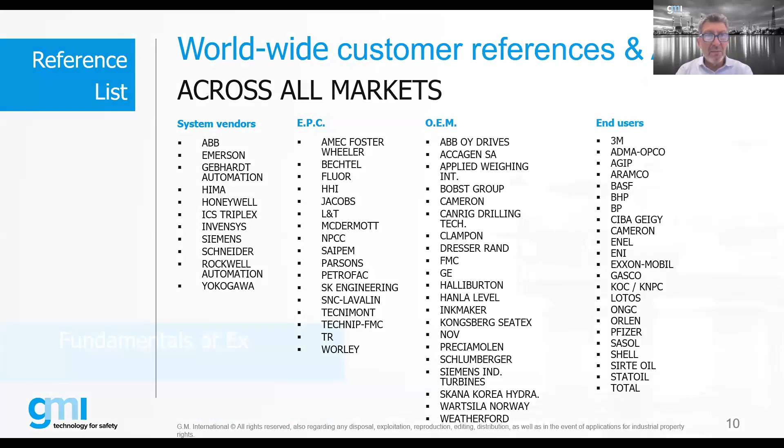So a little bit about fundamentals of EX. We're actually, I realized this morning I'm wearing an Intertek shirt, so I'm actually today teaching a course. My colleague's taking over right now, but we're teaching a Compex course for a bunch of engineers and designers over the next 5 days. So we're going to consolidate the 5 days of what we're doing in the full Compex design course into 45 minutes. We'll hit the high points and give you a little bit of an overview on the fundamentals of EX in particular.

So really getting down to the fundamentals. In order to have an explosive atmosphere, we need to address either gases and vapors and mists, combustible dust, or ignitable solid particles. One thing that usually comes up when we're teaching these courses, people always think it's the oil and gas industry, refineries and offshore oil platforms and everything else. But a lot of people don't realize that we're actually pretty much surrounded by hazardous locations in which a flammable gas air mixture or dust or particles are present, and they operate in many different industries.

I was talking with a gentleman about bakeries, because bakeries use dust, they have dust hazards, so they have to address it in a certain way. So you wouldn't necessarily think a bakery would be a hazardous location, but there are parts of a bakery that actually are. I was talking to a gentleman last week about the automotive industry. They use a lot of solvents for paints and various materials, and so they're actually dealing with robots being suitable for hazardous locations. So there's hazardous locations all over the place that we don't necessarily always think about.

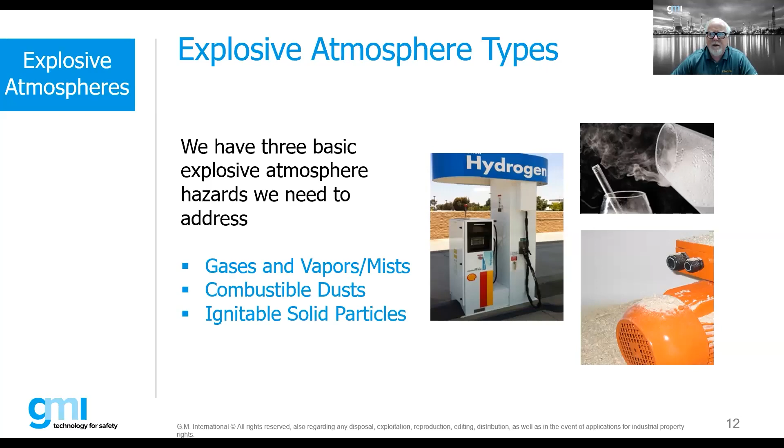So here's the important thing to remember about these explosive atmospheres. Generally, liquids will not ignite, it's always the vapors that are usually the issue. So when we keep it in a liquid format, then we don't usually have problems. But unfortunately, to keep them from becoming vapors, we have to keep them at usually extremely cold temperatures, and that's not practical in many cases. So anytime we're processing, moving, or doing anything with flammable liquids, they will emit vapors, and the vapors are the issue we have to deal with. Of course, these gases can be easily ignitable and very dangerous, given that they can spread quickly and widely.

So there's a term called flashpoint, which we use a lot. Basically, flashpoint is that temperature at which a liquid becomes a vapor, where it'll emit enough vapor to actually cause an explosion if it comes into contact with heat, an electrical spark, or something of that nature. So typically your flash points are different than the ignition temperatures. There's also what's called ignition temperatures or auto ignition temperatures of all these gases and vapors present in hazardous locations. So again, that's the temperature at which an ignitable amount of gas is emitted from a liquid. Ignition temperature is the temperature at which a gas will spontaneously ignite.

So dust can be any of the following types of materials. Not all dust are flammable or explosive, but these are the typical ones: metal dust, aluminum, magnesium, carbonaceous dust, coal, carbon black, charcoal, coke dust, and then certainly some of the other types like flour, grain, wood, plastics, and chemicals.

Some of the earliest hazardous locations that we actually figured out and had to deal with came from the coal mine. Some of the first protection concepts like intrinsically safe and flame-proof were actually developed for the coal mines, because coal mines have a combination of both methane as well as coal dust, and both of them are extremely volatile, very dangerous.

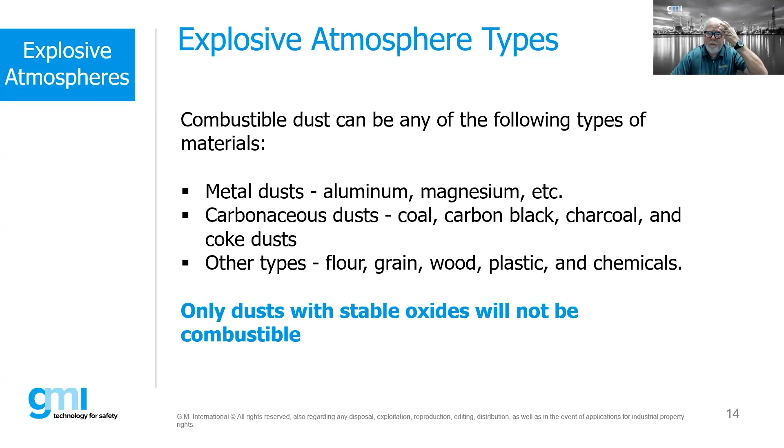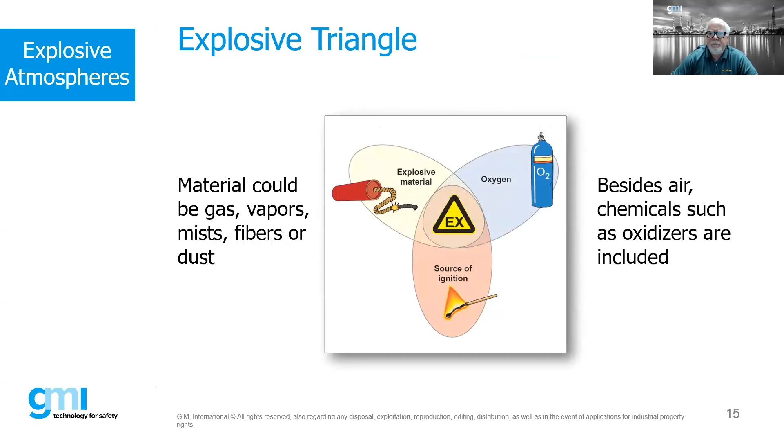So we need to make sure that we understand all those types of energy that can be sources of ignition. Some of them are pretty obvious, right? Hot surfaces could be bearings, engine exhaust, damaged parts, friction, and certainly lightning can be a source of ignition. We had a train derailment here in the United States a couple months ago up in Ohio. The train was carrying some volatile liquids, and it created a huge explosion. They found that it was basically an overheated bearing that was the source of ignition in that instance. Obviously, things like open flames, fires, cutting torches, cigarette lighters, pilot lights.

There's also things like mechanical sparks. There are limiting factors within the standards as far as the types of metals you can actually use, because you can get a reaction from banging two pieces of metal together.

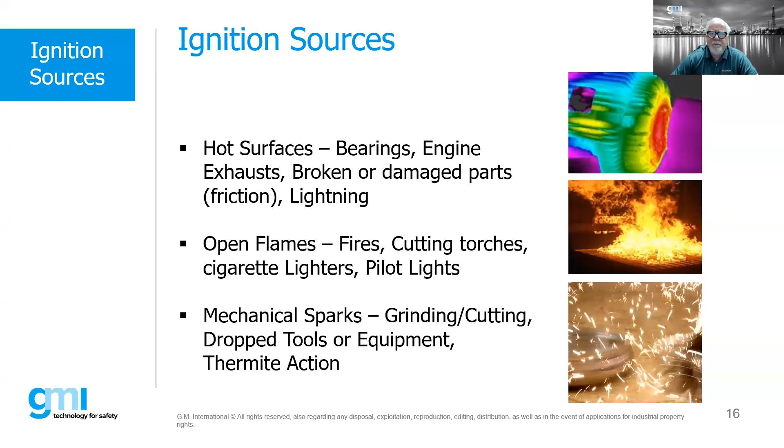So we have to be very careful with the types of metals we're using. Then, of course, there could be stray electrical currents, welding, electrical faults, static electricity, pouring, dust, flowing liquids, conveyor systems, agitators, stirring liquids. All of those have to be addressed for what potential they could have for igniting a flammable atmosphere. And then certainly radio frequency, as we're becoming more and more tied into using Wi-Fi and local area networks in hazardous locations, we have to deal with this as well. We have to be concerned about radiated noise - is there enough energy in which that can actually ignite gases, vapors, or dust?

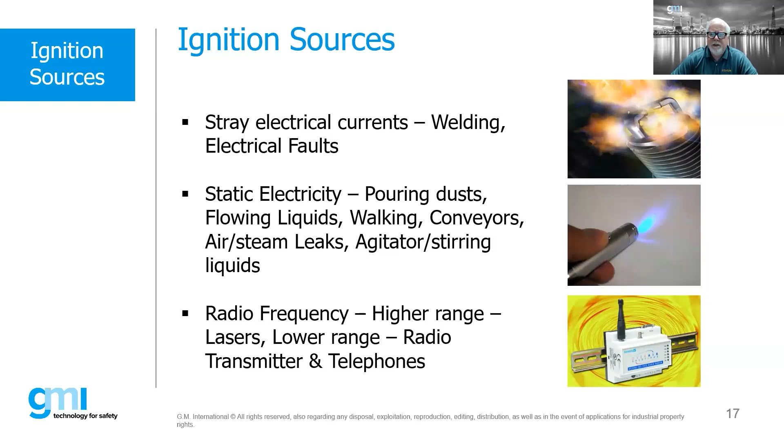And certainly things like batteries, ionizing radiation, X-rays, ultrasonics, exothermic reactions. When we think about exothermic reactions, for example, the ammonium nitrate explosion that took place in Beirut a couple years ago - that was storing ammonium nitrate. When that becomes unstable when subjected to heat, it feeds upon itself, and the next thing you know you have a chain reaction, and in that case, a massive explosion.

So again, we think about the obvious sources of ignition generally, but we don't necessarily take into account some of these other sources of ignition that can be just as dangerous. In some cases these are things we don't necessarily think about, but we need to take them into account in our projects and requirements.

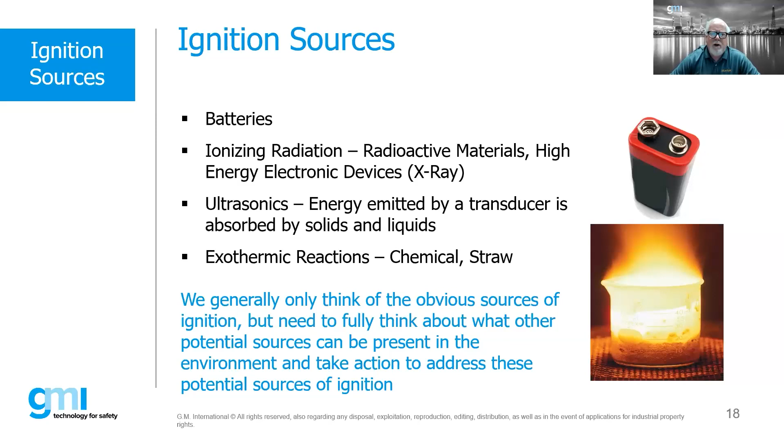So of the gases and vapors out there - and there's a whole slew of different flammable gases and vapors - we categorize these into various gas groups to make it easier for the selection of EX equipment. We group these based upon a couple different factors, one of them being the ignition temperature, but there are some other factors that are actually much more important.

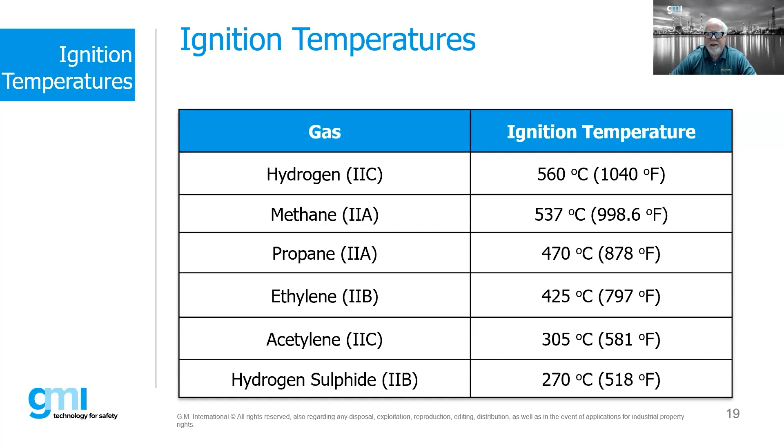Here's some of the common gases and vapors we'll see in industry, such as hydrogen. We consider that a 2C gas. It has an ignition temperature of pretty high, 560 degrees. Something would have to get extremely hot for it to ignite hydrogen from strictly a heat standpoint. All these numbers will be located in the various relevant international documents and IEC documents. You'll find them in NFPA documents, and various other documents that give the relevant information on all the gases and vapors we'll typically find in industry that we have to deal with.

When we talk about intrinsic safety, ignition energy is a key consideration, because the whole idea of intrinsic safety is making sure that there's not a release of energy above that minimum ignition current or minimum ignition energy.

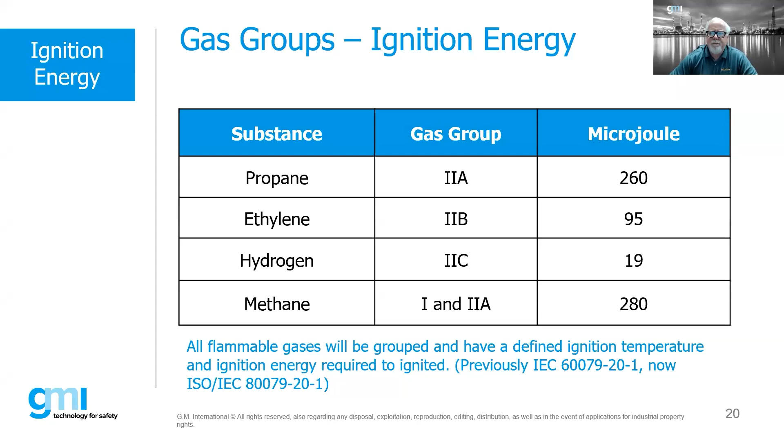So, minimum ignition, LEL and UEL. LEL is the lower explosive limit, UEL is the upper explosive limit. All gases and vapors will have an LEL and a UEL. Generally speaking, most gases and vapors you'll find will have somewhere between a 2% LEL and a 10 to 15% upper explosive limit. Within that area is the sweet spot, if you will, where if we have that mixture of fuel to oxygen, we have a source of ignition - at that point, we're almost guaranteed to have an explosion if it's got enough energy.

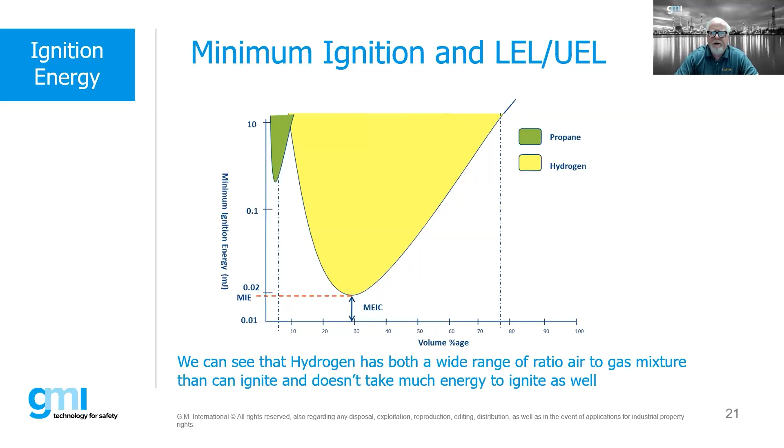I know a lot of people are all talking about using hydrogen as a fuel now. There are some real critical things that we have to be very concerned with using hydrogen. It's a very efficient fuel, but it is also a very dangerous fuel that we need to take special precautions with.

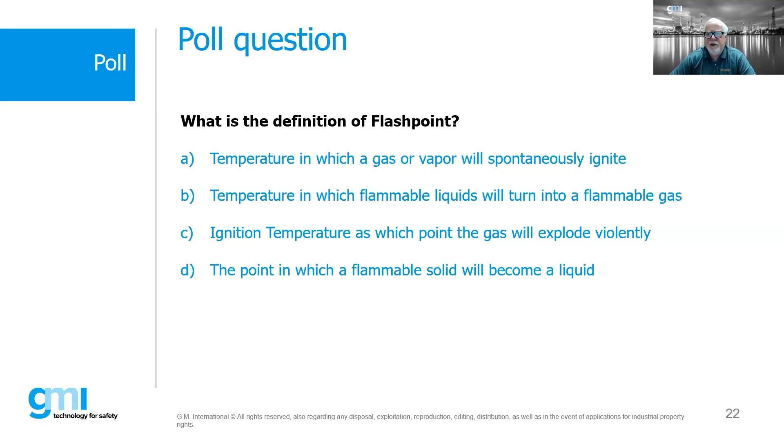Moving on a little bit, we also have to take into account the ignition temperature of the gas, and we actually assign these gases a temperature class number. This becomes important when we start selecting equipment for use in hazardous locations, because we also assign temperature codes for equipment. If we see something that is a T3 piece of equipment, what that's telling us is that the equipment will have an ignition temperature below 200 degrees C. If we see a T3 gas, that means that gas will have an ignition temperature above 200 degrees C.

So in effect, we can use a product that's rated T3 in a T3 environment. We can also use a product rated T4, T5, or T6, because the relevant surfaces of those products, under normal ambient or specified fault conditions, cannot get above 200 degrees C. We cannot use a product rated T1, which tells us it has a relevant surface temperature below 450 degrees, in an environment where the ignition temperature is, say, T3, which is something above 200 degrees. So we have to take this into account.

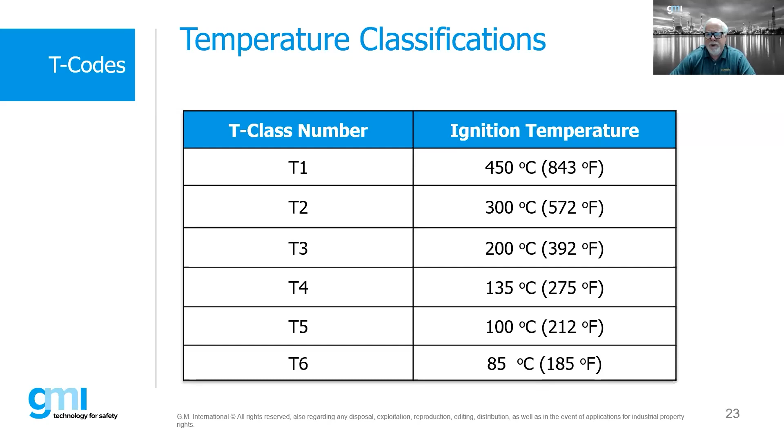This becomes extremely important when we have heat-producing devices like transformers, light fittings, rectifiers, those types of products, or we have gases and vapors that will have very low ignition temperatures. We always have to take this into account - temperature classification. Keep this in mind.

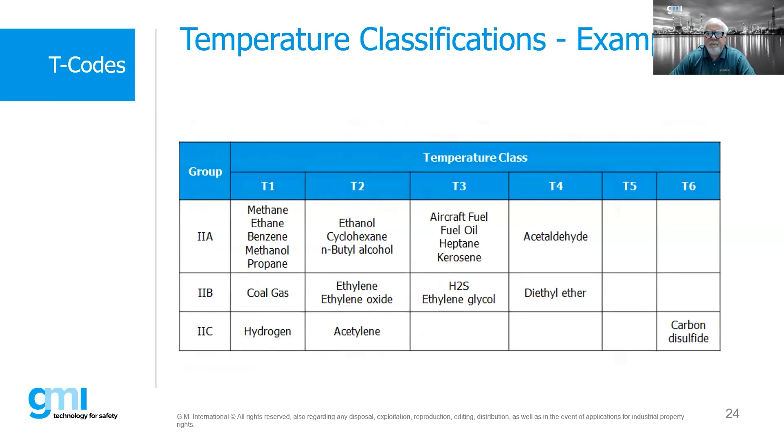We'll assign a T code to all these particular industrial gases and vapors, and that's where this chart comes from - it's more or less showing what I've already explained. One thing you'll notice on this chart, by the way, is right off the GMI wall chart that they give out for free. If you want a copy of it, just drop us a note afterwards and we'll be happy to get this to you.

Using T4 as an example, a product will never exceed 135 degrees C. A T4 gas will have an ignition temperature above 135, but below T3, which is 200 degrees C. Therefore, a T4 product can be used in a T4 or hotter ignition temperature gas environment.

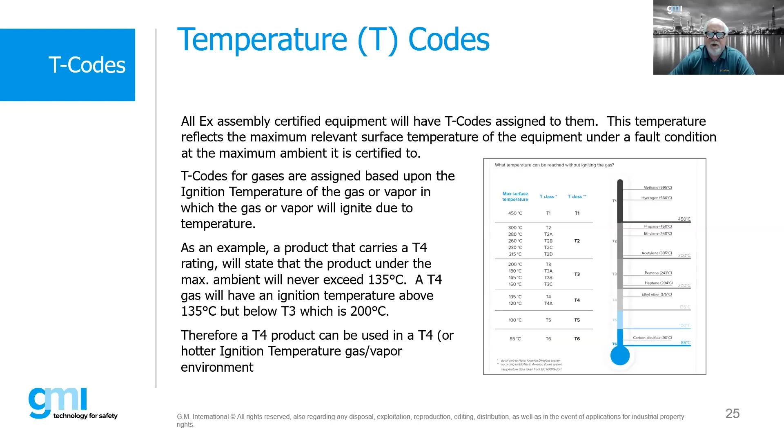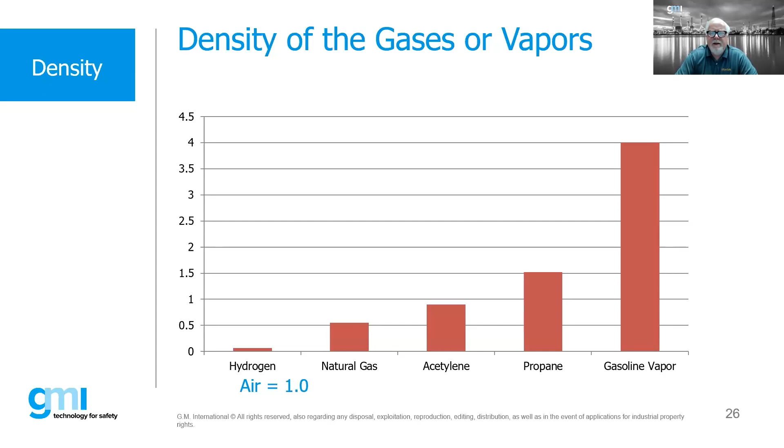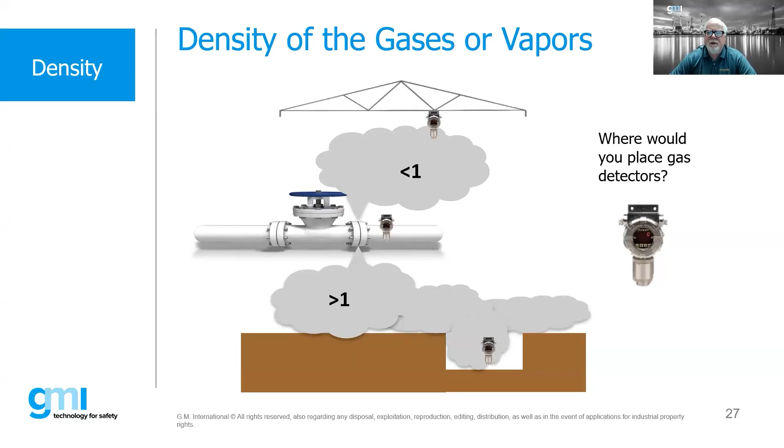This is very important when we're trying to determine where we're supposed to place things like gas detectors. Depending on the density of the gas, we place them in different locations. If the gas is heavier than air, we put a gas detector at a low point. If the gas is lighter than air and it's an enclosed space, we might put them up in the ceiling. And if the gas has the same density as air, we place these gas detectors pretty much everywhere. So when we get into the design of our systems, this starts to make better sense based upon the density of the gas.

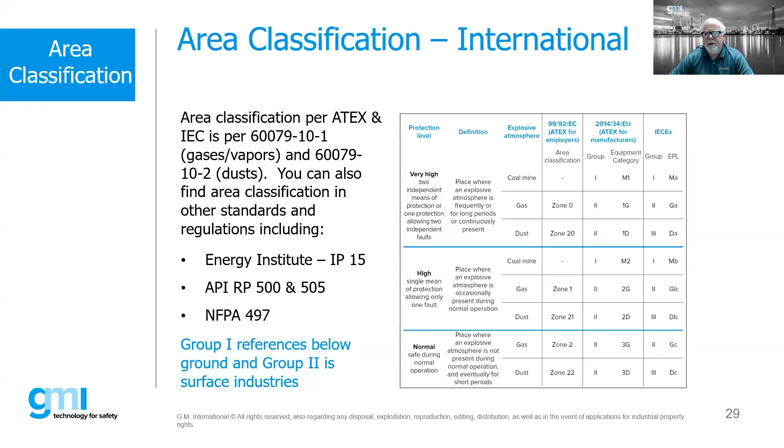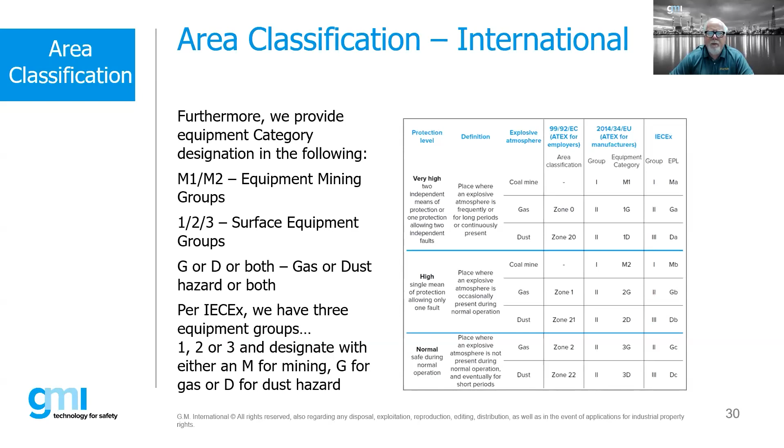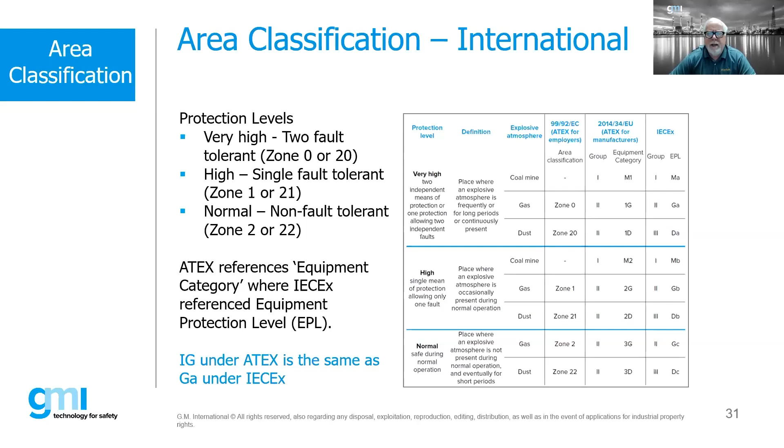We're talking about zone 1, right? Yep. Zone 1, okay. Zone 1. So I think you guys are getting this for the most part here. That's good. Zone 1, we have zone 0 also, right? So yeah, well, zone 0 defined is in here.

Yeah. So okay, because I haven't read this previously, so I'm trying to guess myself which is the correct answer. Come on, Paulo, you know the answer. Normal operation. Yeah, I imagine. It's somewhat of a difficult question. B is the right answer, Bob. Am I right or wrong? What did you say? B? B. Yes. Yes, okay, I got it right. Thank you.

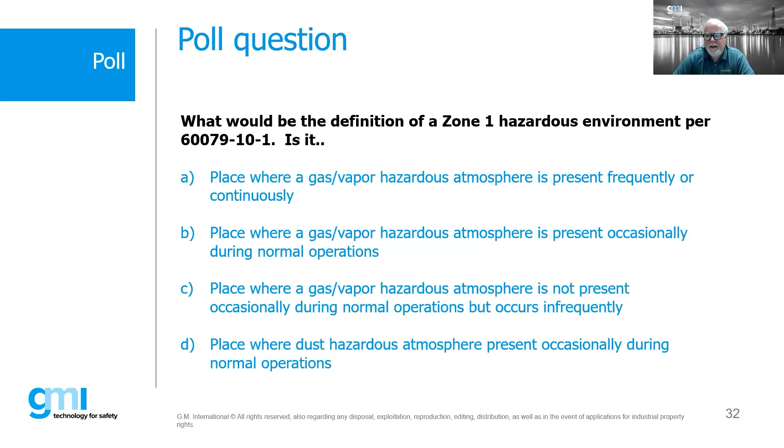Yeah. So okay. B is the correct answer, right? Because A would be zone zero. That's correct. The key word is continuous. C is not present during normal operation but occurs infrequently. That's a zone 2. The issue is on D, when we talk about dust hazards, that is a definition for zone 21, not zone 1. So it's a little bit tricky, right? So dust zones, we actually use 20, 21, and 22, where for gas hazards, we just use 0, 1, and 2. So a little bit of a tricky question there, but you got through it.

So now that we've kind of figured out our gases, vapors, area classification, then we want to get into our protection concepts. And again, this is where we could spend a ton of time, but we only have a handful of minutes to be able to do this. But if you kind of break it down, the Ex protection concepts are, with all these different concepts that are out there, more or less 4 main categories. Energy limitation, which is intrinsic safety. This is where we limit the amount of energy. A non-sparking type device, or a device that basically will not spark whatsoever under normal or fault conditions, that's typically reflected by the concept increased safety.

Things like containment. We contain an explosion, we allow an explosion to take place, but we contain it within an enclosure. That's typically done by flameproof. And then things like separation. We're removing a flammable gas from the source of ignition. Typically, that would be something like pressurization or maybe even oil immersion. So if we think about the legs of that triangle, what we're trying to do is, again, remove one or more of the legs of that triangle or deal with it in some way, shape, or form. For dust hazards, we have energy limitation, just like we do under gas. And again, intrinsic safety, or we have separation, which we call dust ignition proof or pressurization or dust tight. Those are where we're trying to keep dust away from any source of ignition.

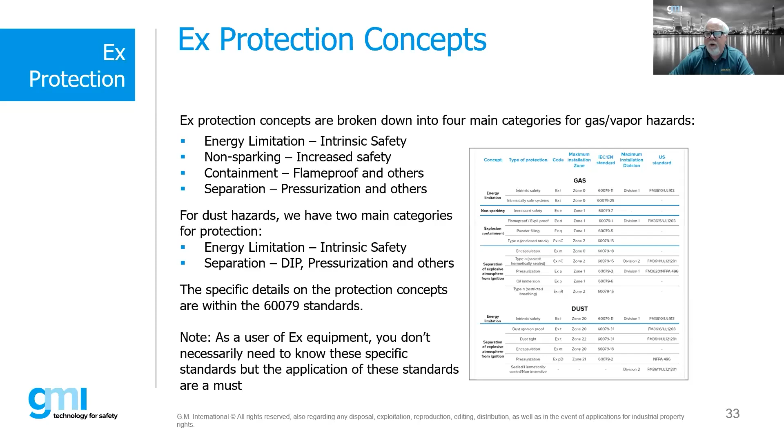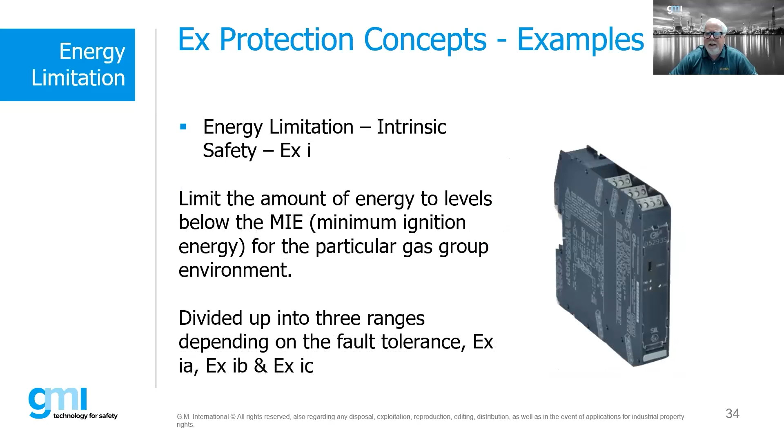So just to go through these in a little bit more detail, energy limitation, intrinsic safety: limit the amount of energy below the minimum ignition energy, and again, divided up into 3 ranges depending on the fault tolerance, Ex ia, ib, and ic. Non-sparking, the most common example is increased safety. So we have eliminated the potential for a spark or arc due to the design of the equipment. There's also what is called non-sparking, which used to be known as Ex nA, is now known as Ex ec, which was a lesser form of increased safety. The tolerances weren't quite as tight. The creepage and clearance distances, the impact resistance requirements, not quite as onerous, but it was only suitable for zone 2 applications, where increased safety was suitable for zone 1 and 2.

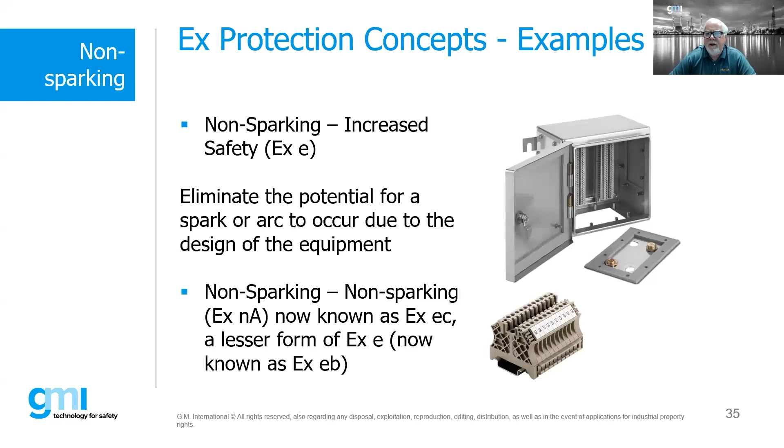So again, we're assuming we're going to have an explosion. This equipment will operate in a fashion to cool down that explosion to where it just doesn't go off and ignite the gas surrounding the piece of equipment.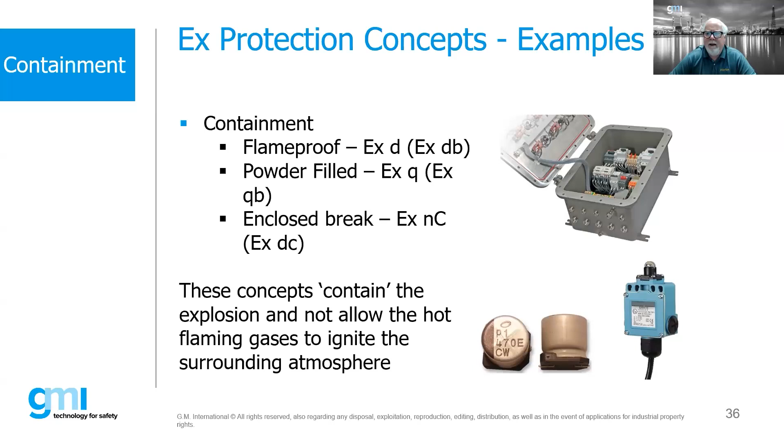There's some other concepts, hermetically sealed, where we're making the arcing or sparking separate from any gas coming into contact. Same thing with pressurization, where we're keeping gas vapors on the outside of our enclosure through the use of artificial pressurization. There's what is called oil immersion, and then finally restricted breathing. So all these concepts are basically separating the gas from the source of ignition.

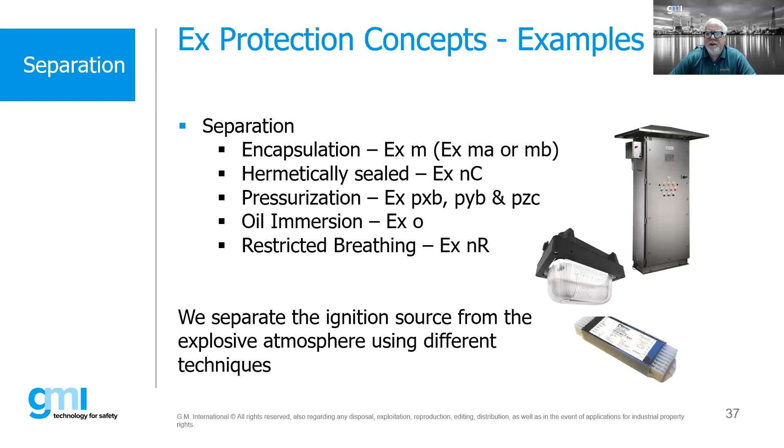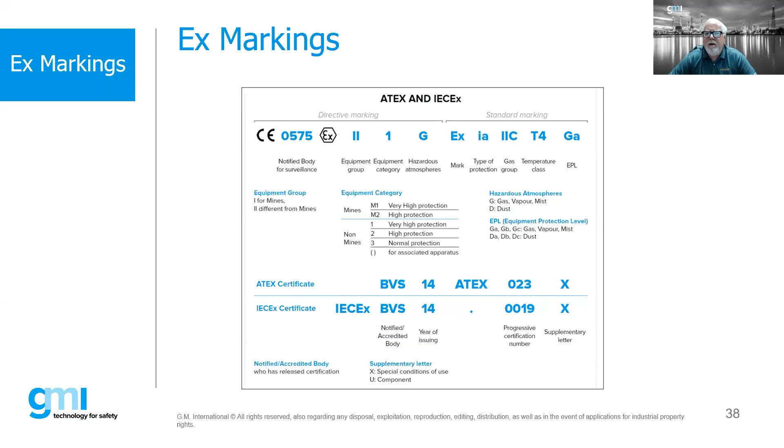So putting all this together is telling us that our product is intrinsically safe, can be used in a zone 0 application as long as we meet the gas groups, which we will, because IIC basically includes all gases. And assuming that the ignition temperature of our gas is T4 or hotter, then we can use this product in any of those environments, and it has its ATEX certification. And down here, it shows its ATEX certificate, and then its IEC EX certificate. So that's how we read our markings and labels.

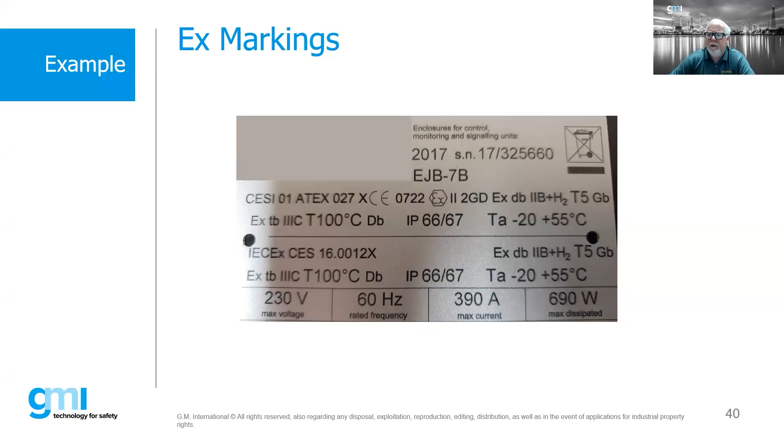So I think this is our last poll question. Yeah, that was going to be a tough one. What is the best answer to describe the following EX marking string? I mean, you show it to us, but it's not easy to memorize all of this, you know? Right. So: II 2 (1) G Ex db [ia Ga] IIC T6 Gb.

So, a flame-proof enclosure suitable for IIC gas group located in zone 1. Flame-proof enclosure suitable for IIC gas located in zone 0. Flame-proof enclosure suitable for IIC gas containing increased safety relays suitable for zone 0. Or a pressurized enclosure suitable for IIC gas located in a zone 1 area containing associated apparatus.

Just on the marking, we need a lesson. Well, thanks, yeah. Good, we have that poster you mentioned earlier available. You can keep it on your desk or on your iPad and look it up. And actually I think we have it on YouTube now. We do have a video where we actually went through the marking strings in detail. Okay, and you are answering a lot of questions.

Every one of you is putting a different answer. Yep. None is clicking D, I guess. Which is good. I have no idea. Honestly, I have no idea what we're talking about. I mean, IIC is the group you said, so it was gas, right? Yes, this is a gas application. So 2 is the zone.

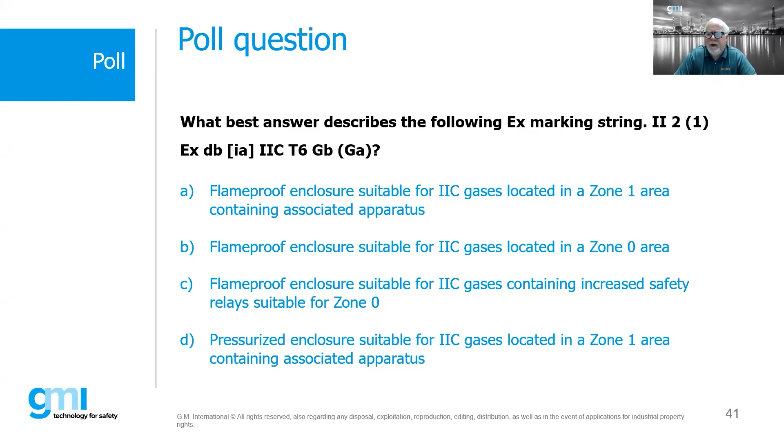It is a flame-proof enclosure suitable for IIC gases located in a zone 1 area containing associated apparatus, which is a fancy term for an intrinsically safe barrier. So this is exactly that application where we take an IS barrier, put it inside of a flame-proof box, and there we go.

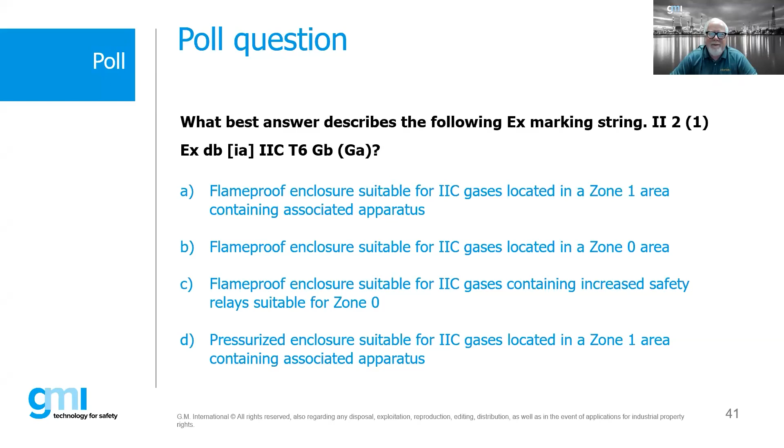By the way, this question is actually one of the questions that we have within our IECEx training and CompEx training. So if you want to go for the training class, don't feel bad if you didn't get it right. It's not an easy one, right?

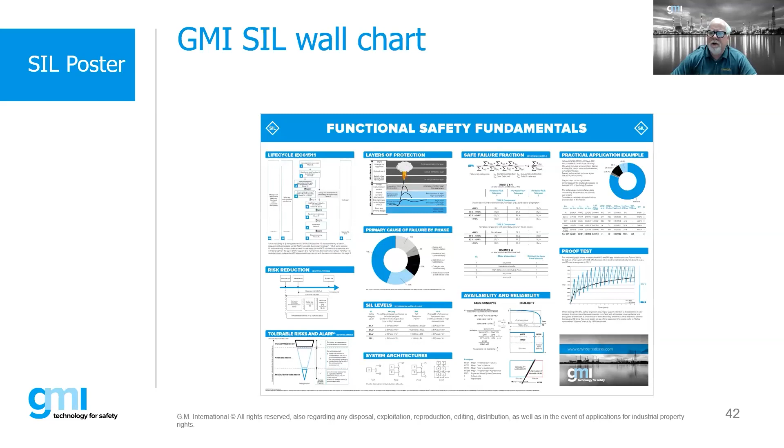Here I think I changed the summary, it has to be a little bit different, but basically the important thing to remember: understand that we work and live and operate in hazardous locations, even though we don't necessarily think about it all the time. Remember, there are different sources of ignition, and even simple little things like when you fill up a gas tank, let's not use our cell phones, because cell phones can be a source of ignition. But here's a big thing that I always see, especially in Texas. We all have pickup trucks here in Texas.

People will take gas cans and fill them up inside the bed of their truck. Sometimes these trucks have bed liners, and all of a sudden static electricity builds up. There are incredible videos where people filling these exterior plastic cans are building up static electricity, then go to put the lever back to stop fueling. They touch it, inadvertently grounding it in some way, shape, or form, and the next thing you know, you have a roaring inferno in the back of your pickup truck.

Hazardous locations exist in areas we don't necessarily think about all the time. Keep it in mind, be safe, don't do anything stupid. Always think twice whenever we're dealing with flammable gases and vapors, or even dust, fibers, and flyings. Don't be the weakest link, right?

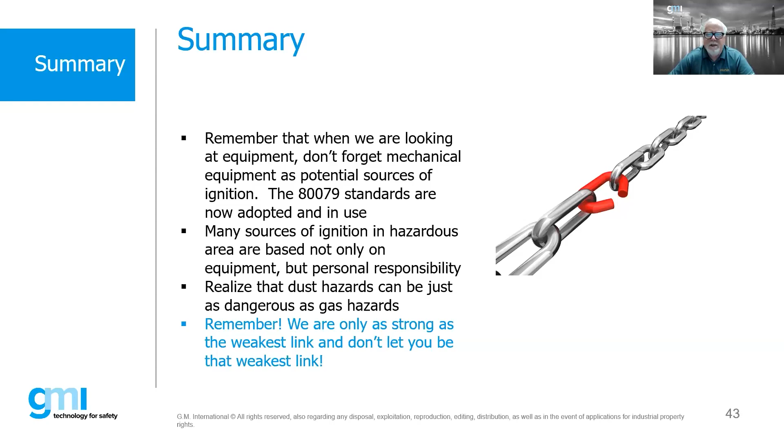Right. So we also have another presentation that we'll do, let me see if I can bring that up. I'll show you this, Bob. Okay, you're going to share that one? Because we have, you see it? So basically, guys, we still have 5-6 minutes. We will show you the answers to the questions you posed through the webinar registration process. Now you still have a possibility to type some questions live, but I haven't seen any.

What is the fundamental difference between flame-proof and increased safety, Bob? Yeah, the presentation, right?

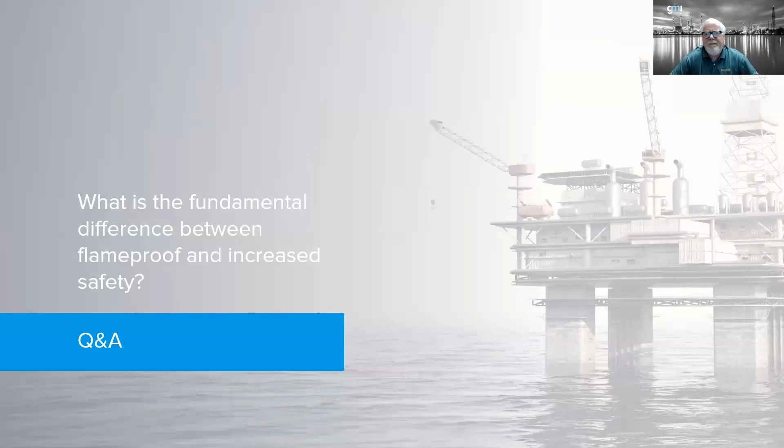Flame-proof is where we take general purpose components and put them inside a cast enclosure, protecting it by the use of the enclosure with bolts, finely machined flanges, flame paths, and containing an explosion. With increased safety, we're limited to basically using only certified equipment on the inside of, say, a plastic box or a sheet metal box. We typically use increased safety for things like terminals, but there's a lot of equipment suitable for use in Zone 2, such as PLCs, HMIs, barriers, or power supplies rated for Zone 2. Instead of putting them in big, heavy cast enclosures, we can put them into sheet metal enclosures.

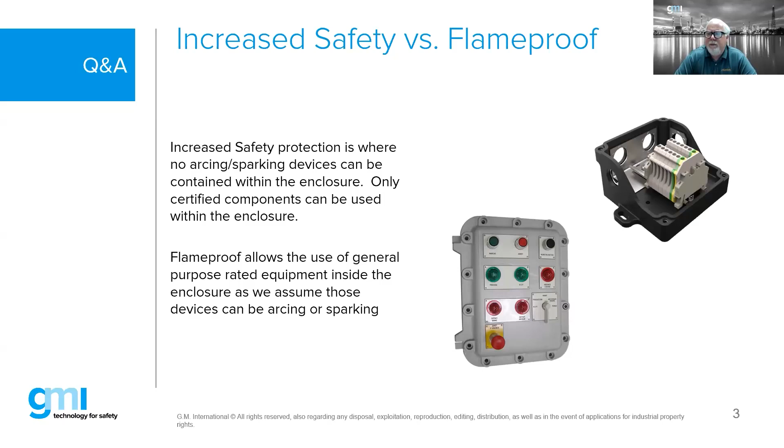Second question: what is the basis for zone classification? It's a risk assessment based upon duration, likelihood, and frequency of flammable gas or dust being present.

We use 60079-10-1 for gases or 10-2 for dust, or some of these other documents. We subdivide based upon a source of release, SOR, breaking it into a continuous source of release, which is Zone 0, a primary source of release, Zone 1, and a secondary source of release, Zone 2. Examples: Zone 0 could be inside a tank, Zone 1 might be a pumping system, and Zone 2 might be a flange joint in piping. This is how we do area classification, and all standards worldwide, no matter which you use, are based upon the same type of criteria. You may get slightly different numbers, but it's the same concept.

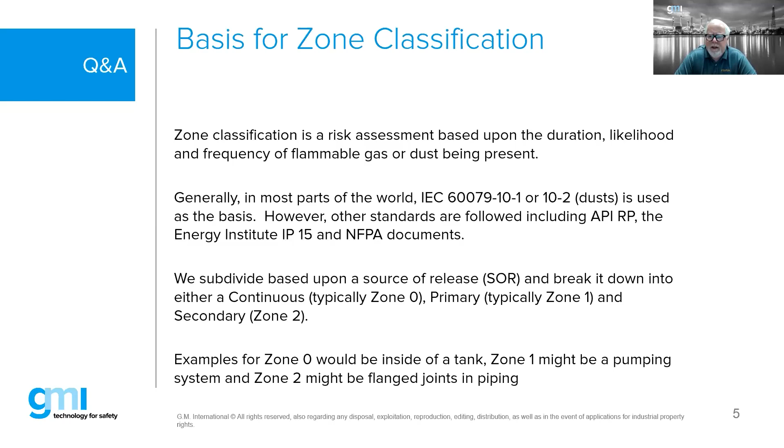Does GMI manufacture product to relevant North American standards? Well, that's a biased question. We do. No, that was a question that came up, and I said, well, I'm going to answer it.

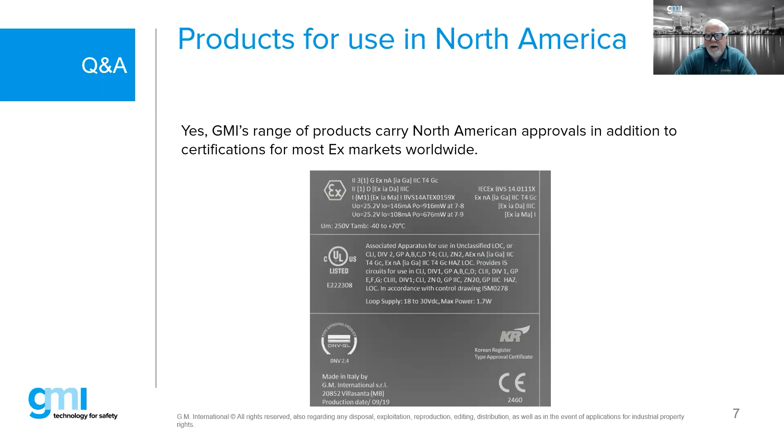Yes, GMI ranges carry North American approvals in addition to certification for most markets worldwide. You can tell it has North American approval if you see the little UL with a circle, a C on the left-hand side, and a US on the right-hand side. That means it's been certified by Underwriters Laboratories to both Canadian standards, shown by the C, and US standards, shown by the US. So products will have ATEX, IECEx, as well as North American approval.

How does EX apply in automotive engineering? Right, yeah, I mentioned this briefly. We have an application going on right now where we're helping and assisting an individual working with robots in solvents.

So, because when you paint with solvent - one of our customers is a robot manufacturer - inside you have DO, basically DO barriers, because the nozzle is driven by a solenoid. You have a solenoid opening and closing. The solenoid is IS, and it must be driven by an IS barrier. And this is the same type of application.

This is a company that doesn't build the robots, but they're building a unit that is used at the end of the robots to more or less clean, if you will, after some of these frames or equipment has actually gone through solvents, and they use solvents to basically clean it.

So basically, it's considered to be a zone 1 or zone 0. Well, I think it's going to be a zone 1 location.

To give you another example of that kind of solvent, we sell to a company that manufactures printing presses, where you take newspaper - it's a 20-meter long machine, and the paper comes in, newspaper comes out the other end. Now, ink is solvent based, so all of the switches that control all the rolling are all in hazardous locations. So you have a lot of DI barriers on those things.

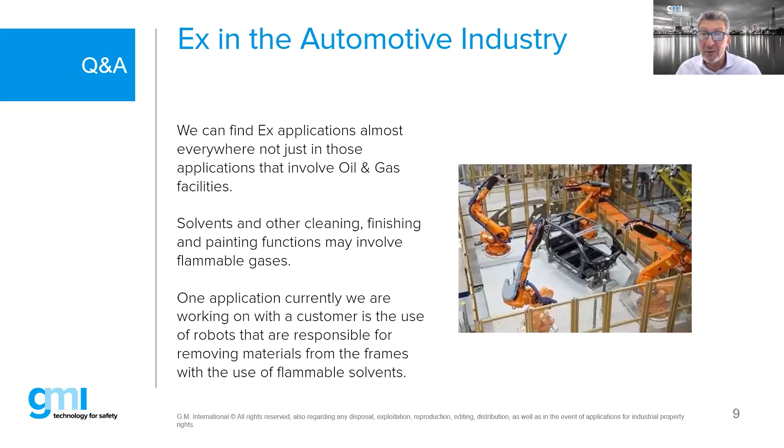Strange application. I want to get certified as competent under the IECEx competency. Well, there you know - how can I do this? Well, just call Bob.

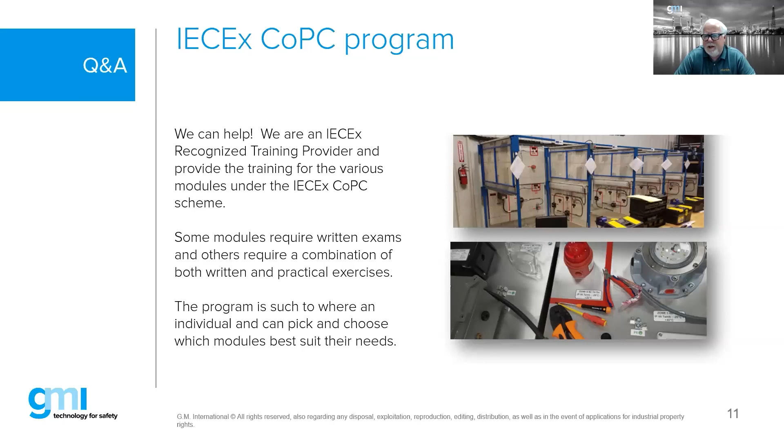So if you are interested, we're considered what is called an IECEx recognized training provider, and the CoPC is Certificate of Personnel Competence. Certain modules require just written exams, others involve practical assessments. Regardless, you can go to the IECEx website no matter where you are in the world and search for IECEx RTPs. You'll see it on the left-hand side of the website, and you can find various organizations like mine. Obviously we're based here in the United States, but many of you are located in various parts of the world, and you can go through that whole process.

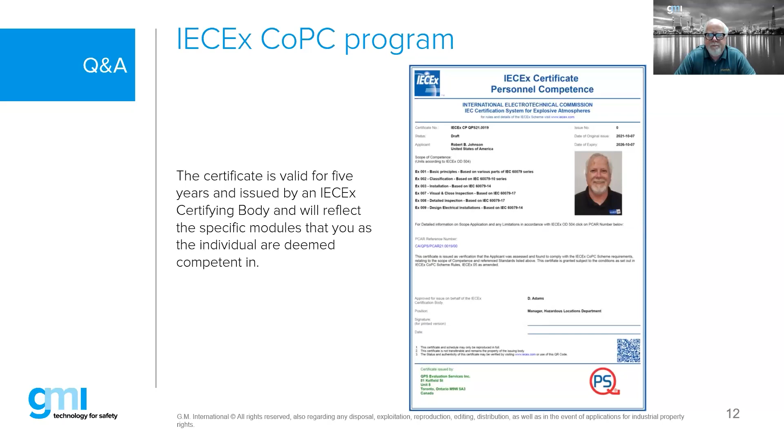You're okay. Oh, okay. So can a barrier be installed in zone 2? It can, yes. But either it must be certified for it, or you can place it into an enclosure.

So as we mentioned, a lot of barriers will actually be rated now suitable for mounting in a zone 2. However, if we have to mount them in a zone 1, then generally we're going to have to take those barriers and put them inside a pressurized enclosure as one example, or put them in a flame-proof enclosure as another example. This does present an issue because when we're selecting barriers, we have to match the barrier to the device, and we have to take into account the total inductance and capacitance.

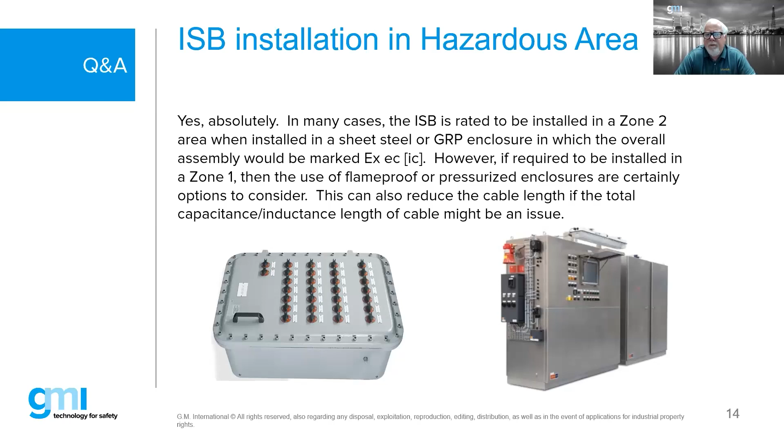So one of the things that people forget about when we take into account capacitance and inductance is the stored capacitance and inductance on your cable length. The longer the cable length, the more potential energy storage. Therefore, we have to be very, very careful, and we start getting close to those minimum ignition energy curves. We want to be very careful about that.